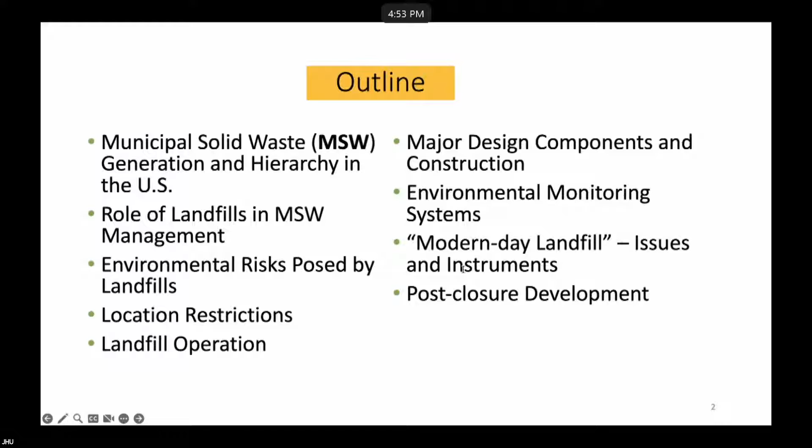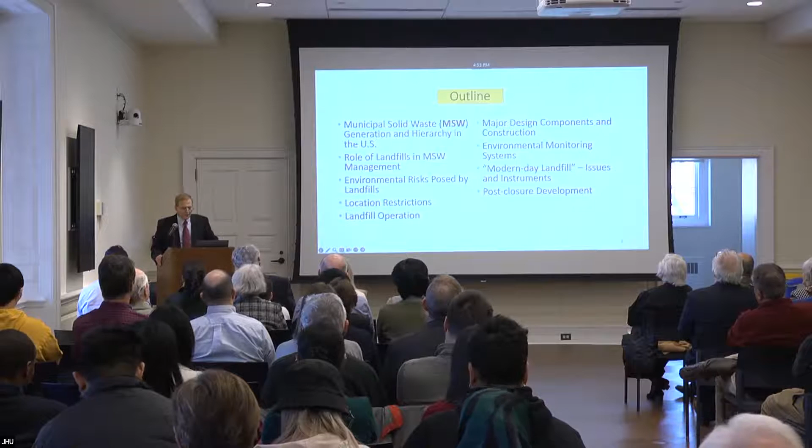So with that, these are the topics I will be covering very briefly: municipal solid waste generation and hierarchy in the US, role of landfills in MSW management, environmental risks posed by landfills, location restrictions for landfills, landfill operation, major design components and construction, environmental monitoring systems, modern-day landfills, issues and instrumentation, and opportunities for post-closure development.

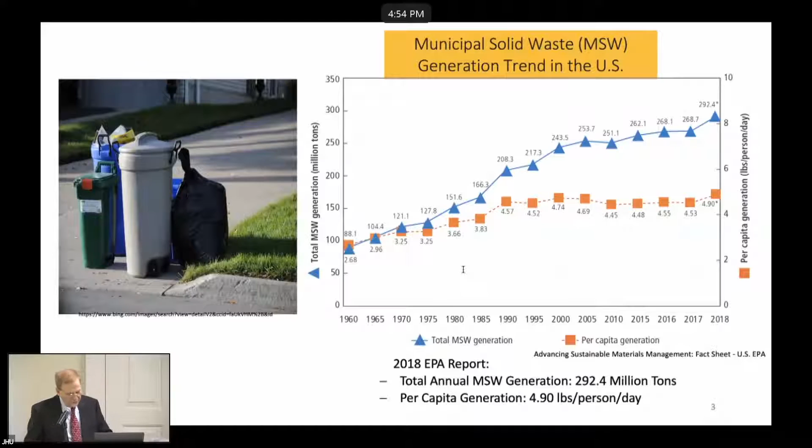I would like to establish the significant role that landfills play in waste management in the US. Starting with waste generation, this graph, obtained from EPA's latest report, shows the trend in solid waste generation in the US from 1960 to 2018. As you can see, there has been a continuous increase in waste generation due to population growth. I estimate that at present there are more than 300 million tons of solid waste generated in the US.

That I totally agree.

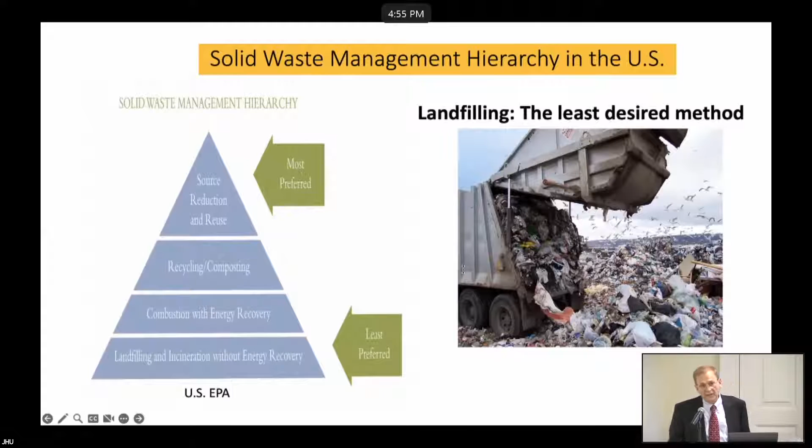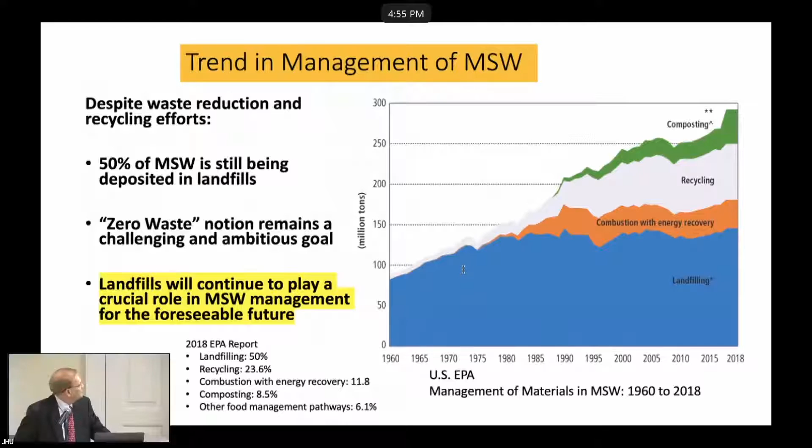However, please look at this slide, the graphs. This chart shows how solid waste is managed by different methods over time in the US. Despite waste reductions by regulators, by private entities, by public entities, still 50% of the waste is being deposited in landfills.

So the zero waste notion will remain a challenging and ambitious goal. And this is the highlight: the landfills will continue to play a significant role in solid waste management for the foreseeable future.

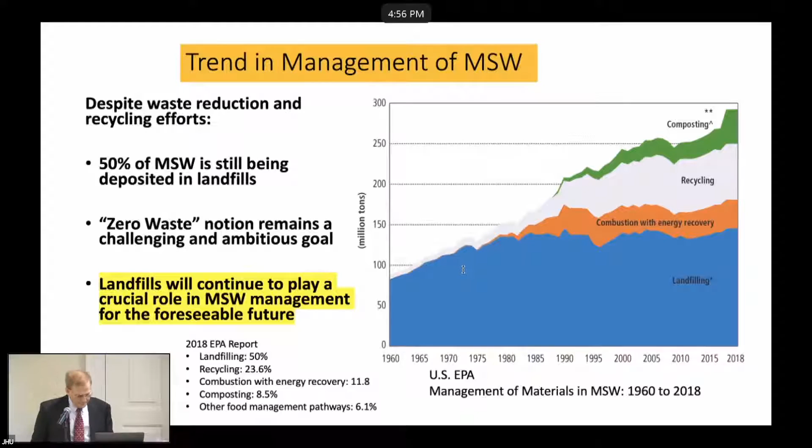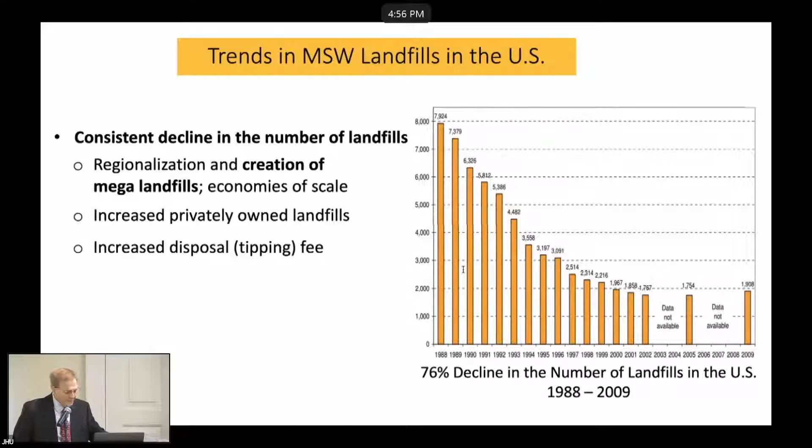Also, it is notable that the number of landfills across the US has declined continuously. If you remember, the waste generation has gone up. And the main reason is these landfills are turned into private, regional, and mega landfills. This is to take advantage of economies of scale and cost reduction.

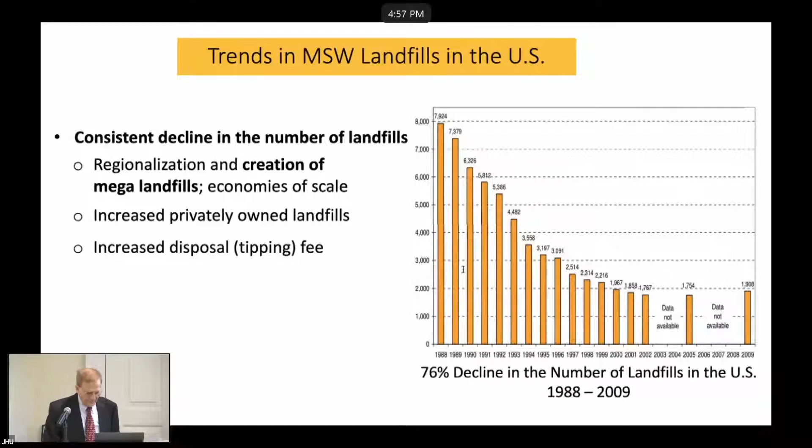So with that, I guess I missed one. Sorry. Yes.

So what are environmental risks posed by landfills? There are many. The most important one is really migration of leachate to groundwater and contaminating the groundwater and surface water. What is leachate? Any rain that comes in contact with waste, or any water that has been generated from the decomposition of the waste and percolates through the waste and gets to the bottom of the landfill, collects at the bottom of the landfill, is called leachate. It has a lot of harmful chemicals, such as toxic heavy metals, dissolved organic, ammonia, and many more.

Other risks include greenhouse gas emissions, methane and carbon dioxide, aviation bird hazard, and altering bird migrations. This is an interesting topic because birds during the winter time, the landfill is warm, there is food, there is water management systems there. So why do they fly?

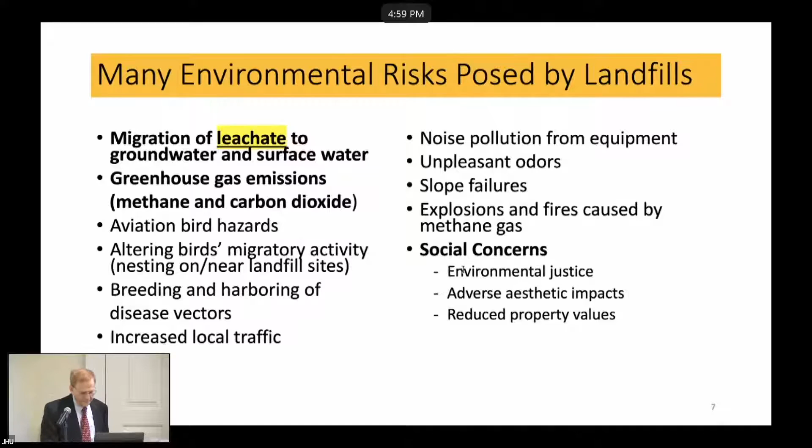So what are municipal solid waste landfills? As it was in the title, these are highly engineered containment systems for disposal of MSW. They are designed, constructed, and operated to minimize adverse impacts on public health and environment. The rest is perhaps not as important.

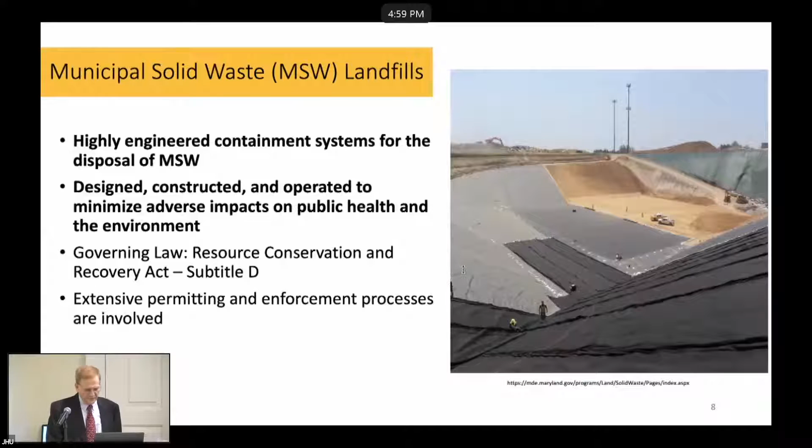Landfills cannot be located near or in environmentally sensitive areas. These include airports because of the bird hazards, wetlands, 100-year floodplain, faults, seismic impact zones, and unstable areas.

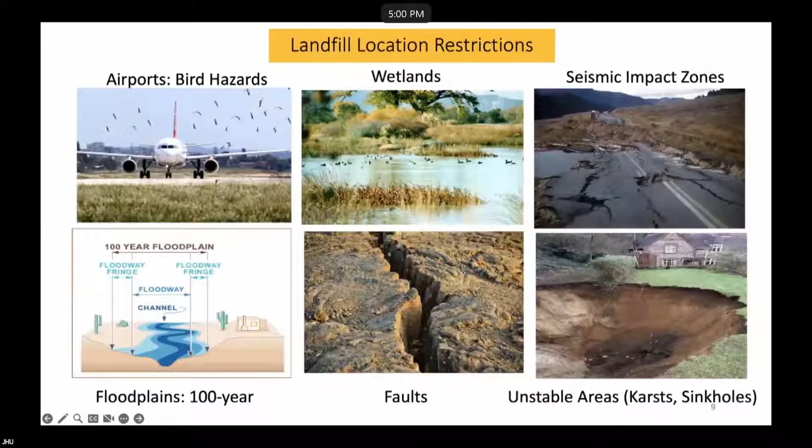Just to get you acquainted with landfill operations, these are some general terminologies that are being used. Working face is the place that solid waste is being deposited and compacted. Cell is the volume of waste and daily cover placed during one operating day. If they work during the night, that's one operating period. Lift is a completed layer of series of adjoining cells. For example, in this case, we have several cells and 1.5 lift.

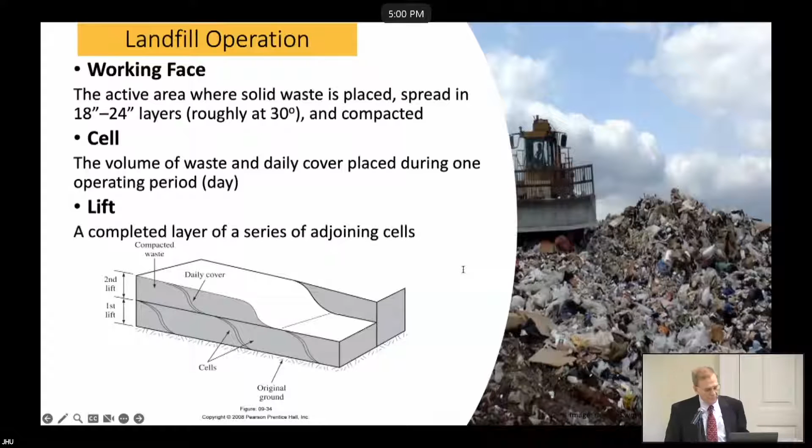And daily cover, at the end of each day, we cover the waste with 6 to 12 inches of soil or alternative materials, could be foam products or geosynthetic. What are the purpose of daily cover? There are many, but some of them are odor, preventing odor. And perhaps one of the most important one would be fire, preventing fire, and disease vectors, bird attractions, and so forth and so on.

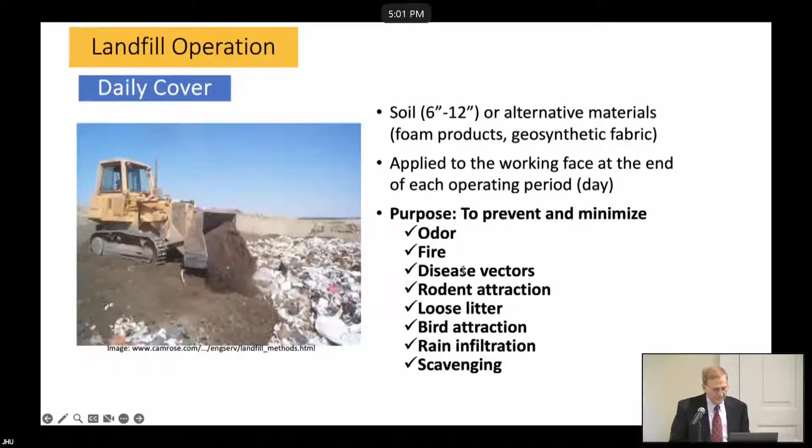That landfill major design components include a base liner with leachate collection and removal systems, gas collection, recovery, and utilization, closure cap, surface water and drainage control systems, environmental monitoring systems, and post-closure development.

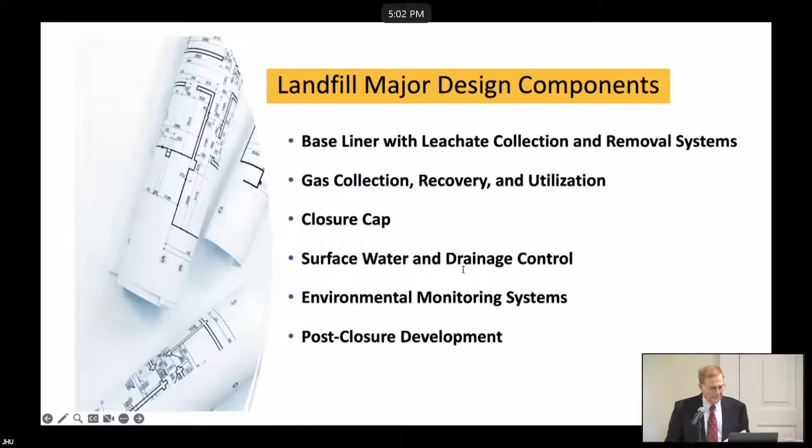So this depicts a general schematic of the vertical cross-section of a landfill. I will provide you with more details in my presentation. The blue zone depicts the groundwater. The brown zone implies the buffer zone from the bottom of the landfill to the groundwater. Then we have a compacted clay liner with a synthetic liner on top of it. The purpose of this liner is to prevent leachate migration to groundwater.

Further up, we have drainage layer to convey leachate. There are also sumps for leachate collections and pumps to remove them. And also, as you see, there are monitoring systems such as groundwater monitoring and gas monitoring systems. And then, as I said, when we get to the top of the landfill, we cap it, that I describe momentarily.

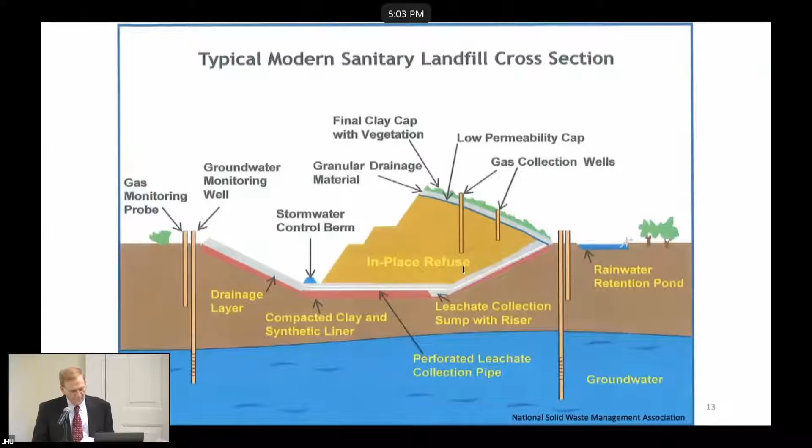So let's get to the interesting part. I will present several natural and geosynthetic material used in landfill construction, starting with clay liner.

The purpose of the clay liner is to prevent leachate migration to groundwater. It is compacted. The thickness is 2 feet. It is constructed in series of compacted 6 inches thick lifts, and you must bind them together properly. A key parameter is the hydraulic conductivity, or the coefficient of permeability that governs the flow of liquids in porous media. In this case, please look, it is really, really minimal. This means 1/10 million centimeter per second.

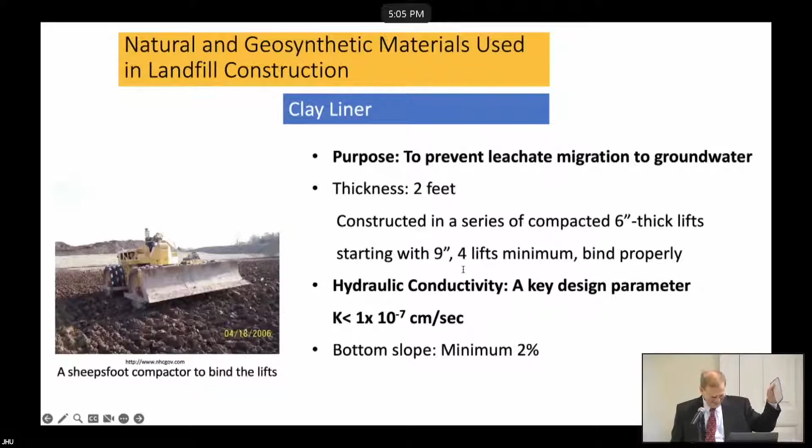Then we have, and instead of this, we have that actually could replace this. We have something called geosynthetic clay liner that could substitute the actual clay liner. It is a layer. I brought some samples for you. There is a layer of pure bentonite backed by geotextiles.

On top of the 2 feet of clay or GCL, in order to add protection, we add something called FML, or flexible membrane liner. And this is the way they are seamed together.

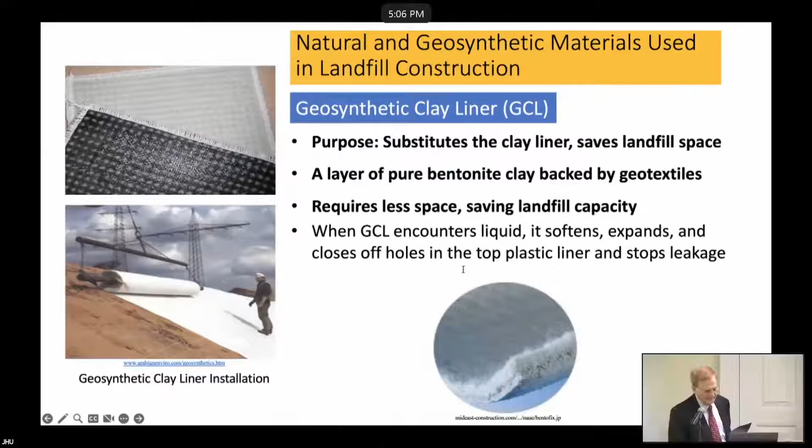I apologize, I am behind. Okay, this is geosynthetic clay liner. And this is the geomembrane, this one. And this is the way it is anchored to prevent slippage.

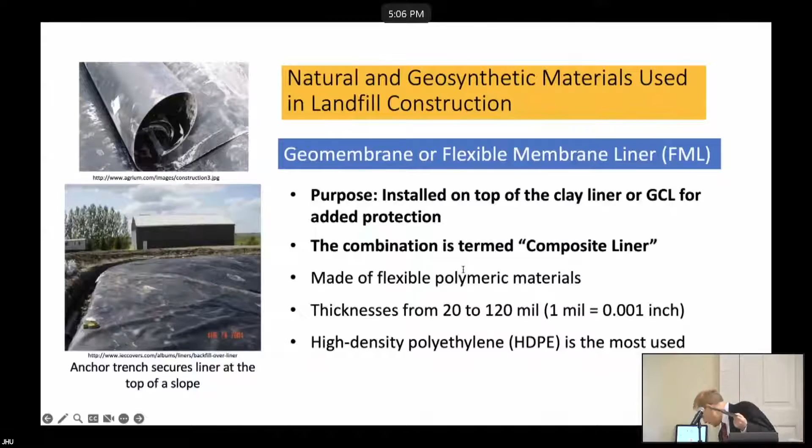So the combination of this and the GCL, or the clay liner, is called a composite liner.

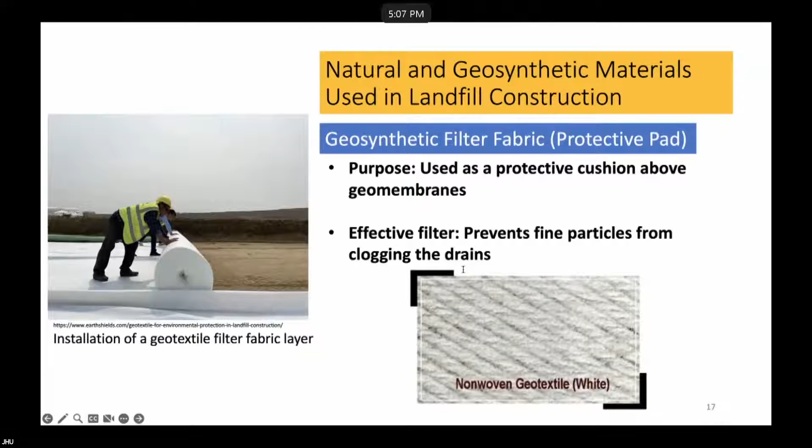Then we have this up here, called a geotextile. It has a lot of applications. One is we put it over the FML, the plastic, to prevent it from puncturing. The other is that it's a wonderful filter, and that prevents basically fine materials from clogging drains. So this is a geotextile, right up there.

Then we have the granular drainage layer. Its purpose is to collect and convey leachate. Thickness is 12 inches, and we need a series of drains and pipes to collect leachate. One design parameter is that the maximum leachate height above the liner should not exceed 12 inches.

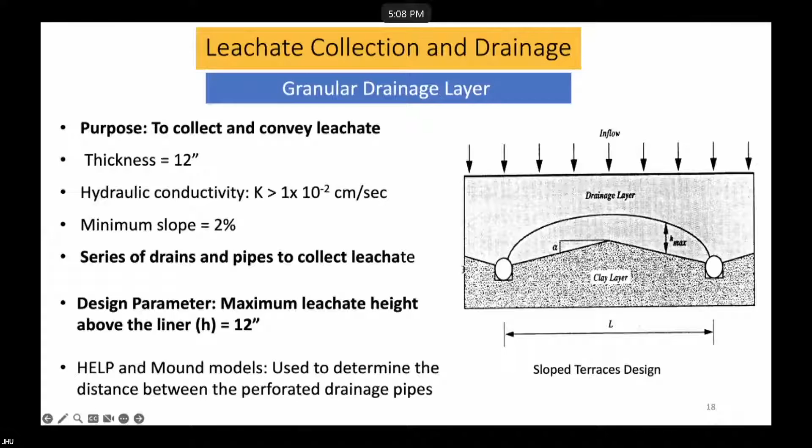This is one technology used, called sloped terraces. These are the materials that could be used in a drainage layer. Please note, we could also use shredded tire as a way of recycling used tires.

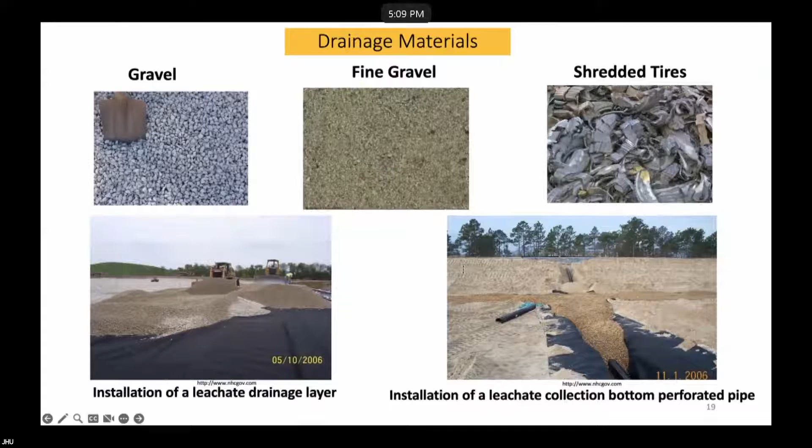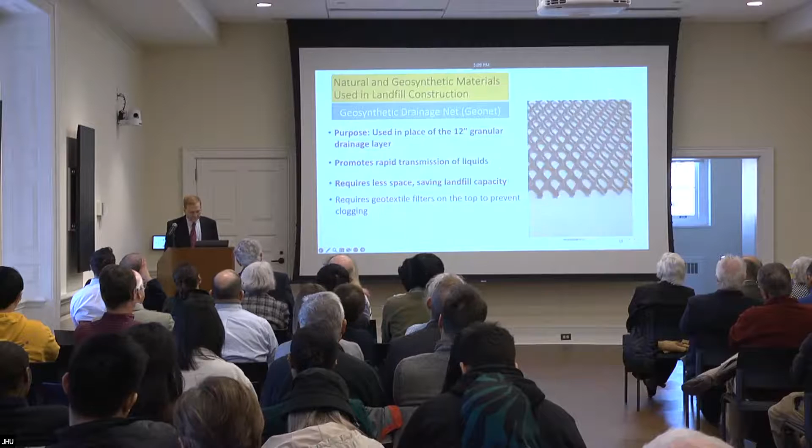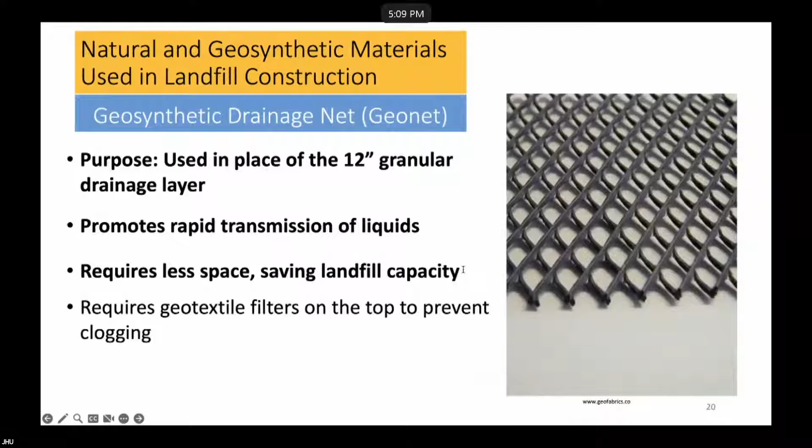This is interesting. Another construction material is called Geonet. This is 3-dimensional, highly transmissive for conveying leachate. Keep in mind, instead of 12 inches of sand or gravel, you could just use this one, so it saves a lot of landfill space. However, keep in mind, this clogs.

So in order to prevent it from clogging, if you remember, we use a geotextile to cover it.

Now we have to remove leachate. There is gravity flow, where the land slope allows it. In this case, we don't need pumps, so we save some cost of pumping. However, it needs to penetrate through the liner and might create some issues in the future, some leakage. Otherwise, we use sumps to collect leachate and pumps to remove them. Also, we need risers and manholes to access and clean up.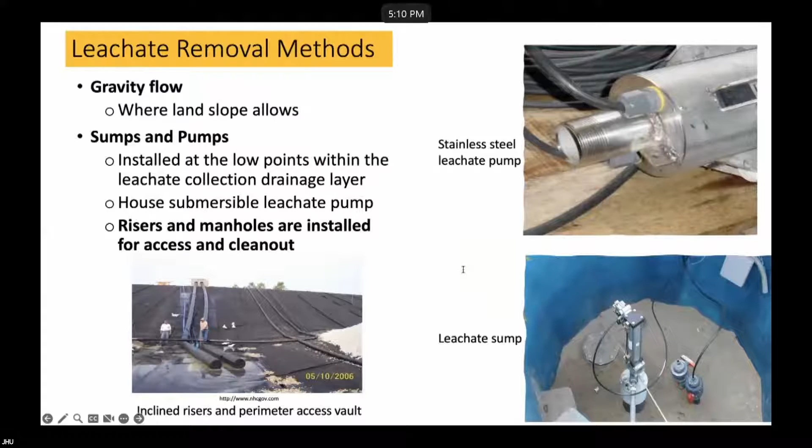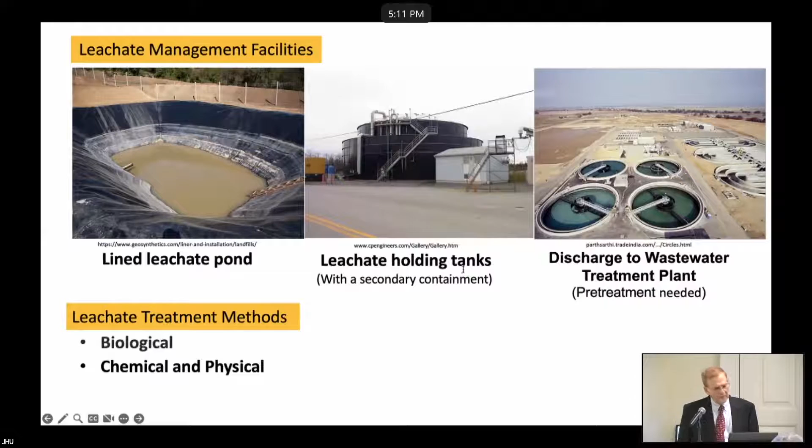Leachate management facilities include lined leachate ponds, leachate holding tanks, and discharge to wastewater treatment. Please note that in this case we might need pre-treatment. Leachate treatment methods include biological methods, and chemical and physical methods, and there are many subcategories of these.

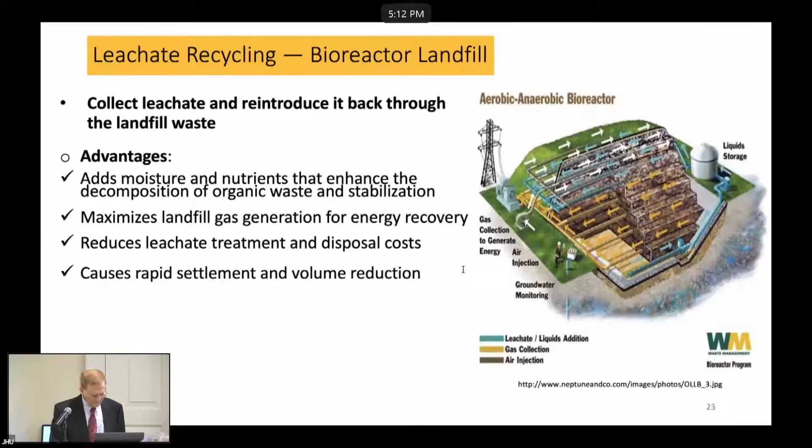Now let's switch to gas. Landfill gas constituents include principal gases, mainly methane and carbon dioxide, almost 50% each, depending on the life of the landfill, and trace gas compounds that are generated at very low concentrations. Please note that methane and carbon dioxide are both potent greenhouse gases.

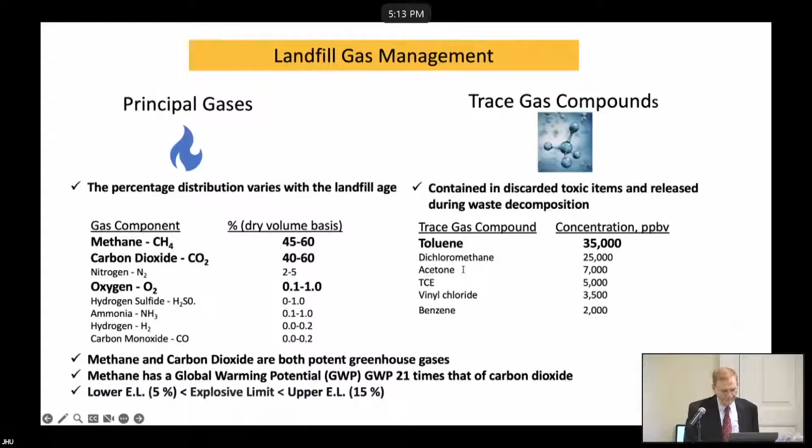Landfill gas control has two methods. One is the passive method. In this case, the driving force is the gas buildup and pressure inside the landfill itself. The gas production is limited. Examples include pressure relief and interceptor trenches, shown here.

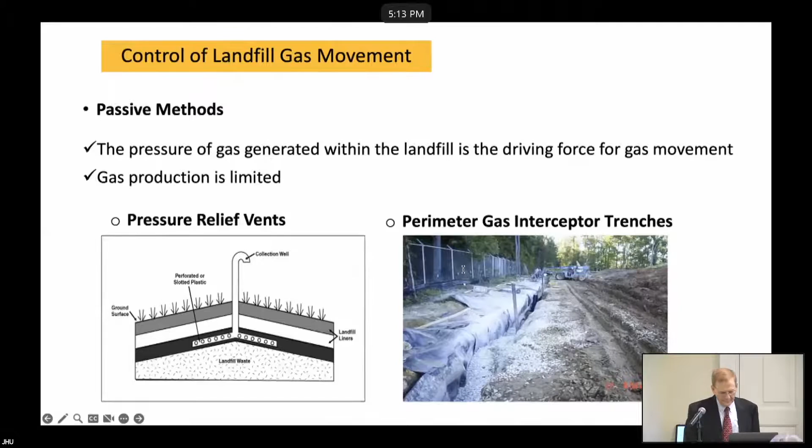Another method is the active method. Energy is in the form of an induced vacuum, and the generated gas is utilized for energy recovery. Vertical and horizontal gas extraction wells, shown here, are examples.

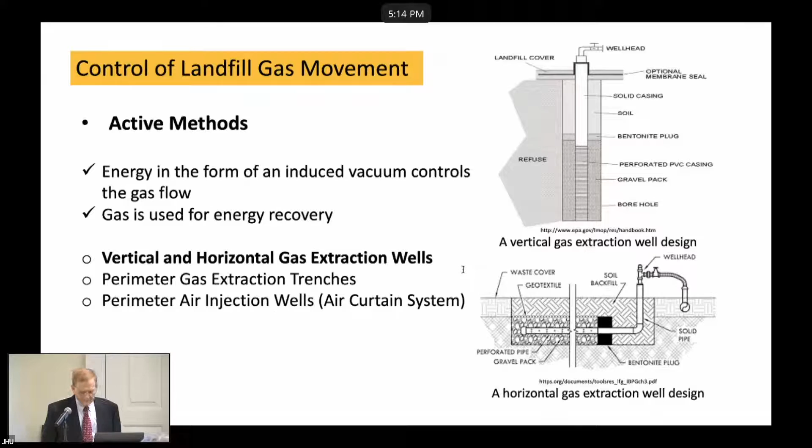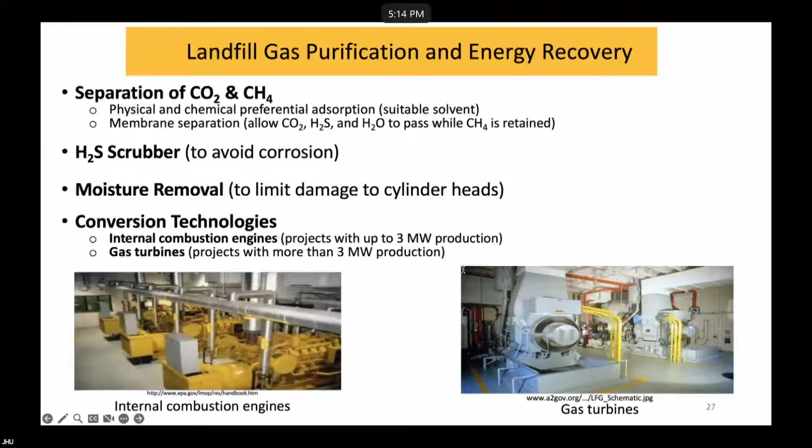In order to use landfill gas, we need to basically clean it up or purify it. Carbon dioxide and methane are separated using different technologies. Hydrogen sulfide and moisture are removed. Conversion technologies include internal combustion engines, for projects with up to 3 megawatts of production, and gas turbines, for projects with more than 3 megawatts of production.

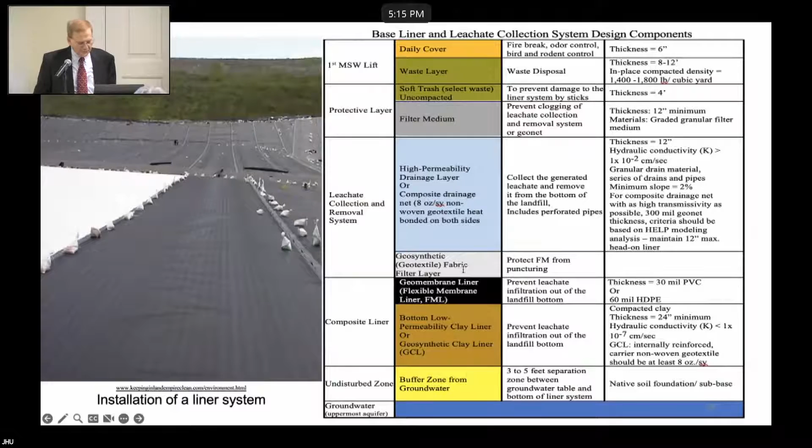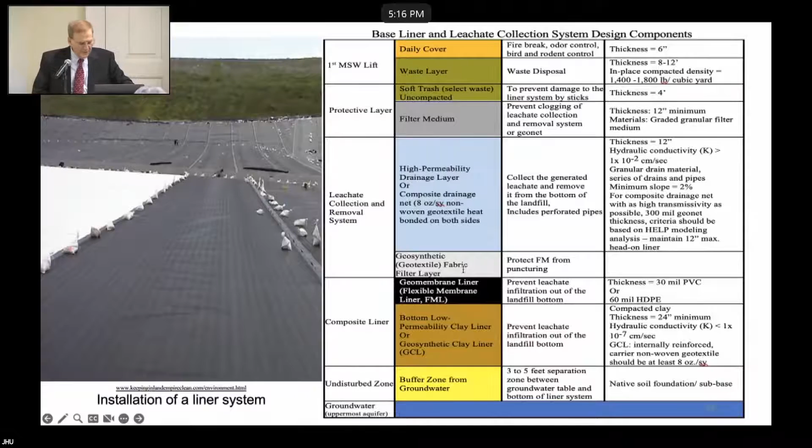So let's start with the blue region at the very bottom, that depicts the groundwater. Then we have the buffer zone. We cannot dig into groundwater to build landfills. Then we have 2 feet of compacted clay with low permeability. Please remember, instead of this, we could use GCL. I can't find it... you could use this guy, GCL.

In order to add protection, we have FML on top of it. To protect the FML, we put a GCL over it—I apologize, a geo pad over it. Then we put the drainage layer over it. In order to protect this, we have another layer of geo pad over it.

Sometimes they come like this, and manufacturers have made life easy for us. That is for the drainage layer. We could use granular material or that geonet.

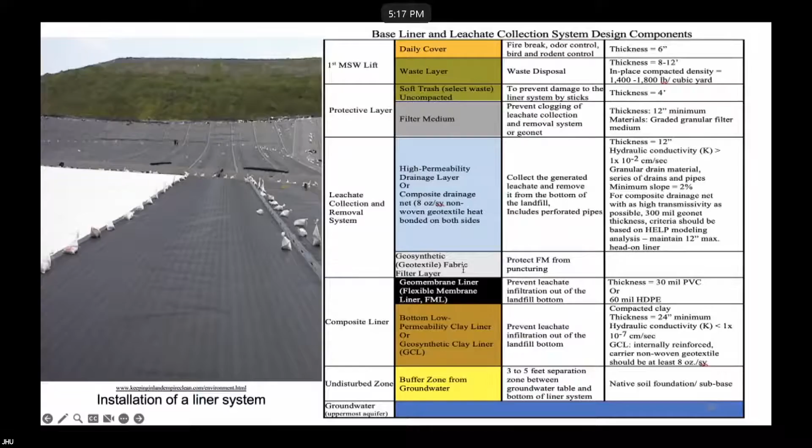Then we have a protective layer, and then we can start putting waste. Please note that the first four feet should be soft trash, because you do not want to damage the liner.

Then after it gets to the final elevation, which is designated in the permit or by design, we cap the landfill. Again, this is the last top MSW lift.

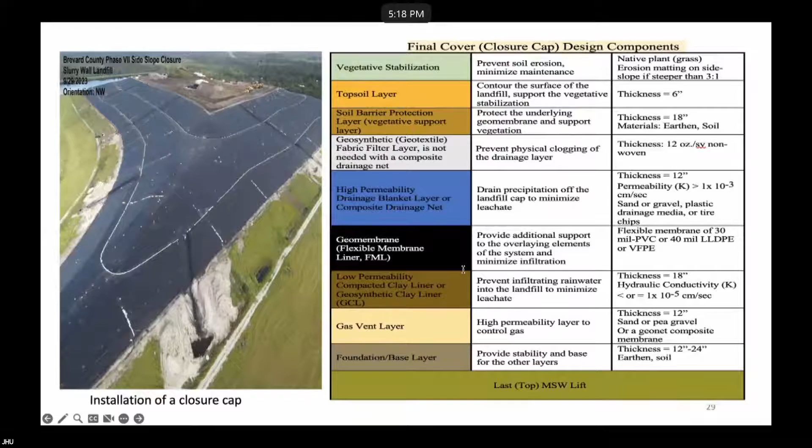We have a foundation, then we have a gas vent, and we have 18 inches of low permeability compacted clay. Please note that the specifications for this compacted clay are less stringent than that in the bottom liner.

Because on the top, you are preventing rain from becoming leachate. At the bottom, we are preventing leachate from migrating into groundwater. So in this case, we have an FML for added protection, and a drainage layer to convey rainwater, 12 inches.

Instead of that, we could use GeoNet. Then we install geotextile to protect the drainage layer. And finally, there is a 2-foot layer of soil with the top 6 inches being topsoil suitable for vegetation growth.

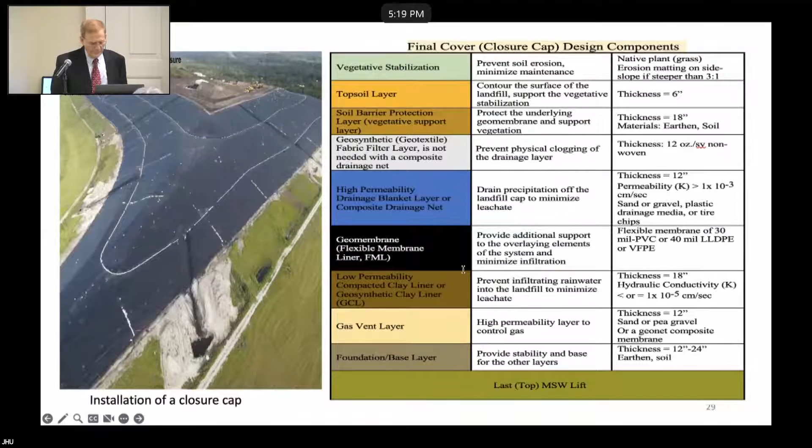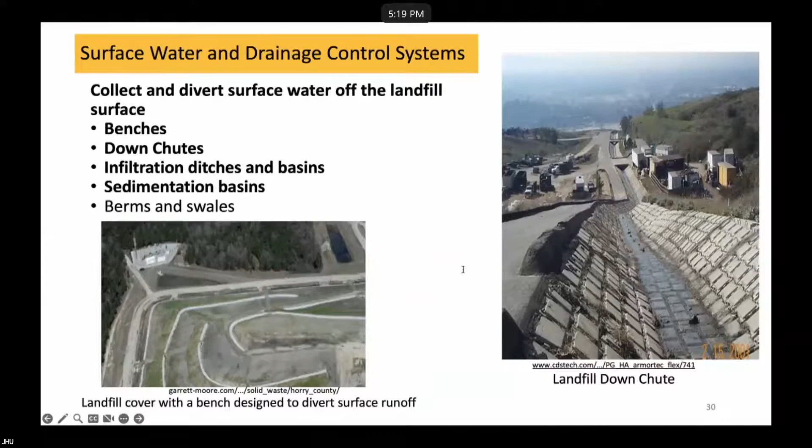Then we have to monitor landfills. There are two major systems—there are many, but two major ones. One of them is the groundwater monitoring and response program, which includes detection monitoring, assessment monitoring, and corrective action monitoring. These are basically successive levels.

Then we need a groundwater monitoring system: a minimum of 4 monitoring wells, 1 up-gradient and 3 down-gradient, with sample frequency semi-annually or quarterly, and we need 4 independent samples. Students really need to know a lot of hydrogeology to be able to take independent samples.

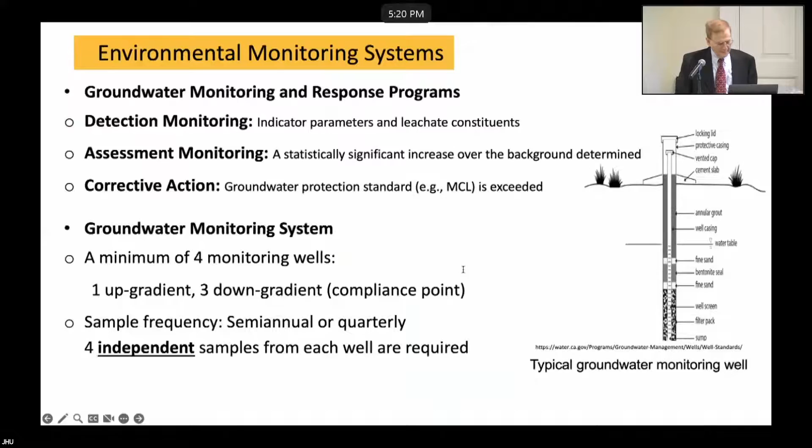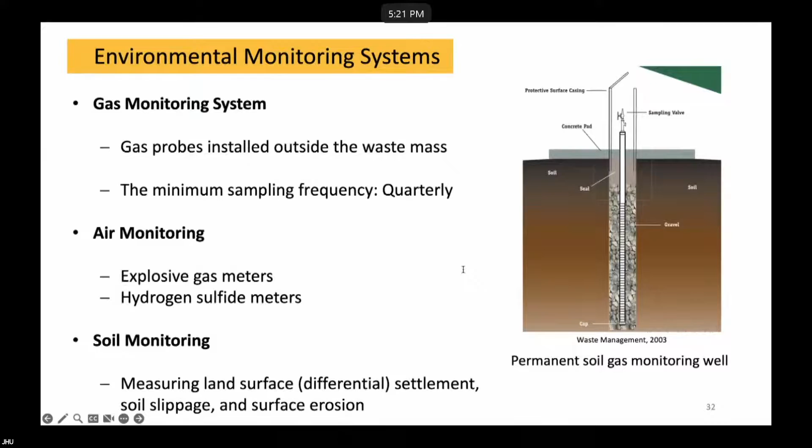The next item is gas monitoring. There are gas probes installed outside the waste pile for air monitoring—please note, this is not a gas extraction well, just a gas probe for monitoring. For air monitoring, we need to look for explosive gases and hydrogen sulfide and monitor those.

Soil is monitored for differential settlement, slippage, and surface erosion.

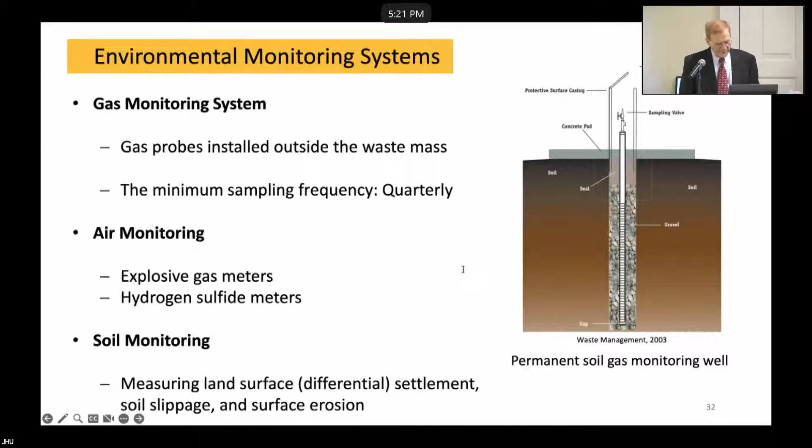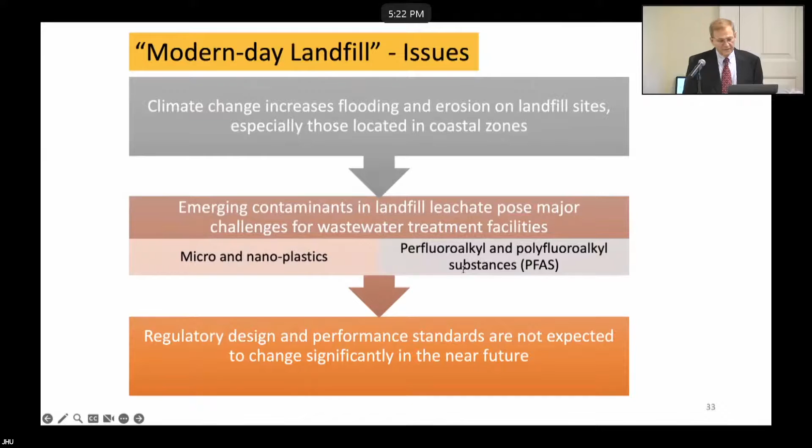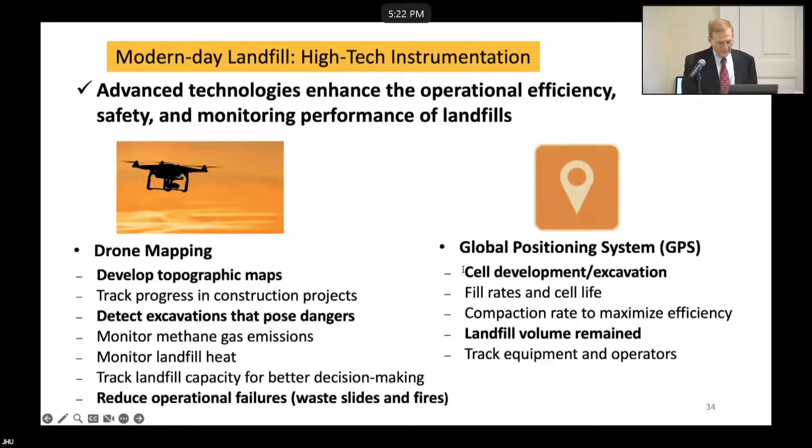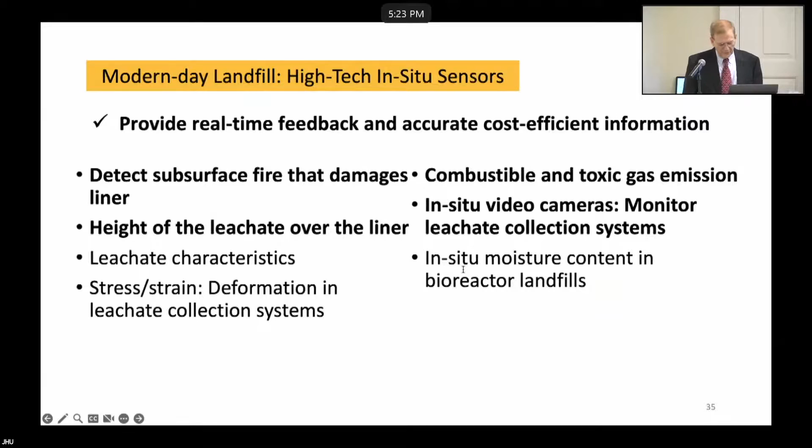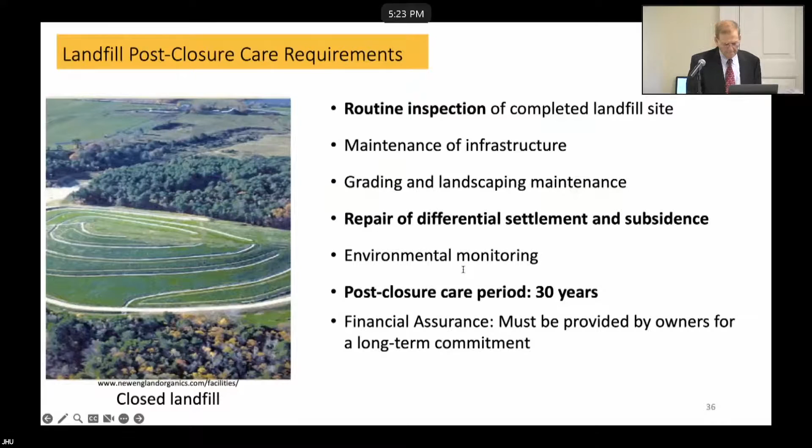Post-closure requirements include routine inspection and maintenance of infrastructure, and repair of differential settlements. This is due to different decomposition rates. And you need to continue this for at least 30 years.